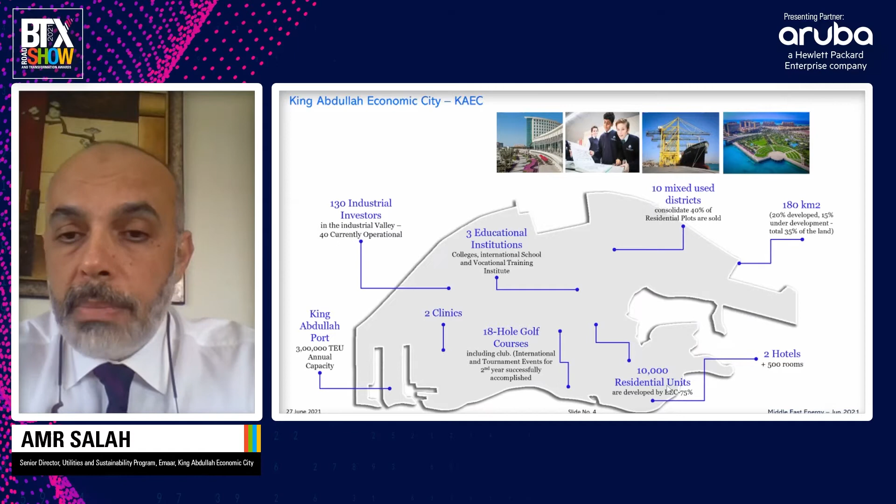We have 2 hospitals and clinics, an 18-hole golf course, 3 educational institutions, 10 mixed-use districts for residential and commercial use, almost 10,000 residential units - about 50 to 60,000 residential capita. We have 2 four-star and five-star hotels, with up to 500 rooms.

The whole area of the city is about 180 kilometers square. 20%, as I said, is developed so far, 15% is under development, and the rest is under planning.

It is actually a huge city in terms of area - equal to Washington, D.C. in size - and we are trying to make this a model of a true smart city.

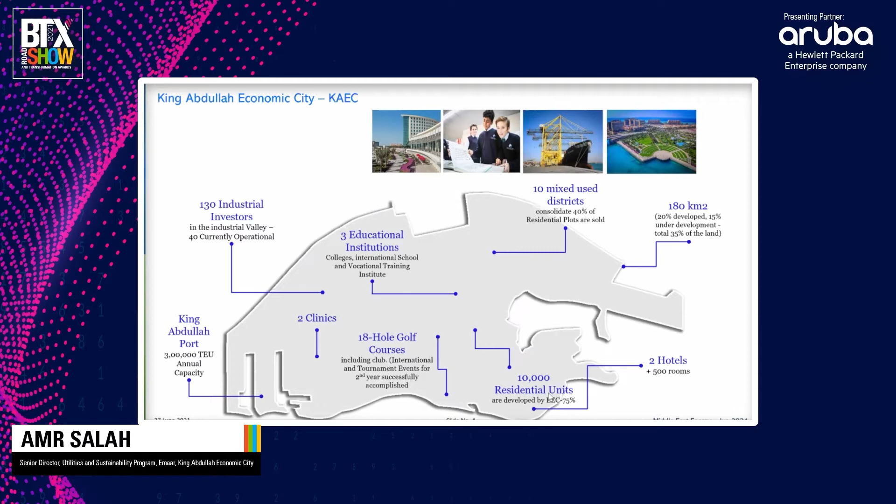As I said, we're talking about 180 million meters square, or kilometers square. The port is about 14.6 million meters square. We have 470,000 meters square for the high-speed railway, one of the stations on the high-speed railway on the west coast of Saudi Arabia, coming from Mecca, Medina, and King Abdullah Economic City. We have about 48.8 million meters square total for industrial and logistic districts area.

We spent about 9 billion SAR on infrastructure investment to have state-of-the-art infrastructure. The infrastructure supplies potable water for industries and residential use, about 30,000 meters cube - this is our current demand. And we are installing about 3,300 smart meters; we'll talk about the smart meters in a while.

Plus, we have about 310 kilometers length of water transmission and distribution system. We have 500 megavolt ampere connected load in the national grid, equipped also with almost 3,500 smart meters for electricity and digital billing.

We have 12 kilometers length of high voltage transmission system, 1,200 MV/LV distribution electricity grid, 14,000 poles of LED street lighting, 12.8 kilometers length of dry gas network to serve the gas zone in our industrial area for our industrial customers, 240 kilometers of roads, 161 kilometers for the drainage system, and 2,000 of sewage treatment per day - this is still at a very initial stage.

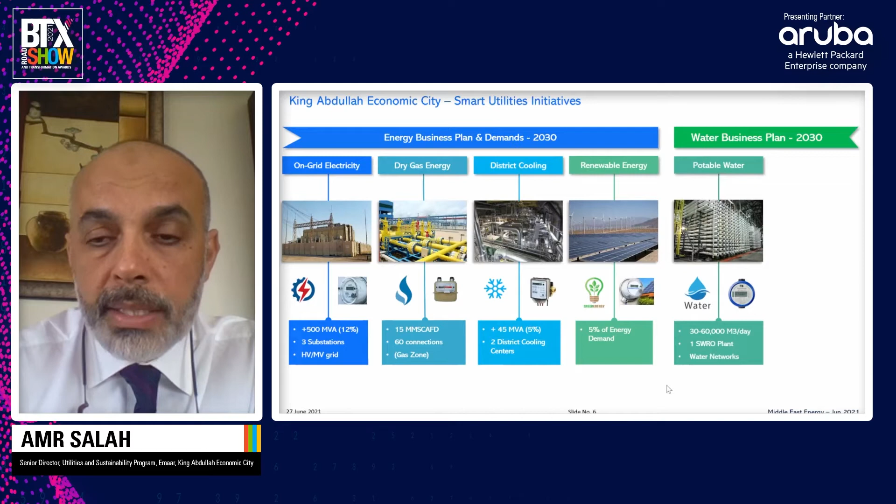For water, we have a plant producing up to 60,000 cubic meters per day with seawater reverse osmosis plant technology, which we'll discuss in a while. We have a water network and distribution system. The sewage treatment plant is one of the innovative solutions used in our plant and city, treating up to 12,000 cubic meters per day, though the demand is currently in an initial stage.

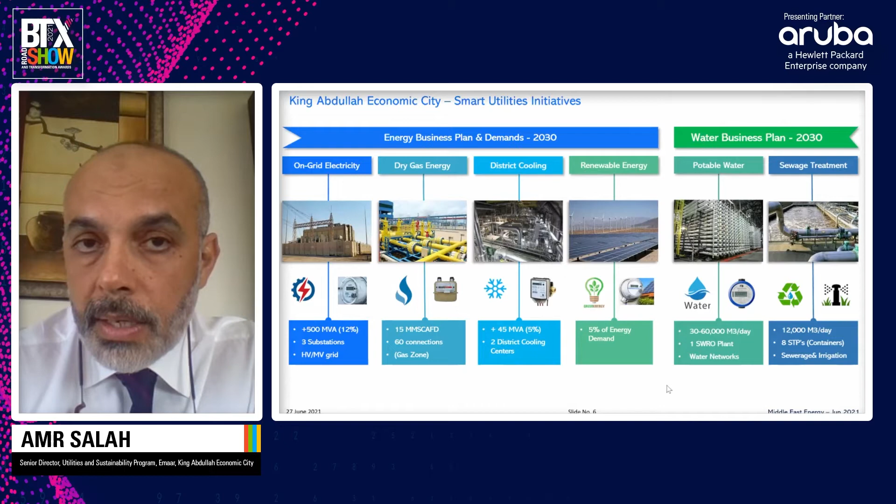It is 100% environmentally friendly, with 60% less energy versus other technologies producing water. We spend about 3.9 kilowatt hours to desalinate 1 cubic meter of water, while other technology can spend about 14 kilowatt hours to produce 1 cubic meter of water. We have energy recovery systems inside the plant for this conservation and economy of scale.

Outside the plant, we have a very good system for water quality monitoring to assure the water quality is consistent and reliable for different types of customers, like residential, industrial, leisure, and tourism. We are fitting all of this, as we said.

Smart meters can monitor leakages and provide instantaneous readings for customers. Any customer can use their mobile phone to see how much water they've consumed so far and the projected water consumption. Maybe this is not that essential for residential, but it's very essential for leisure, tourism, hotels, and industrial hubs, who are very concerned about their efficiency.

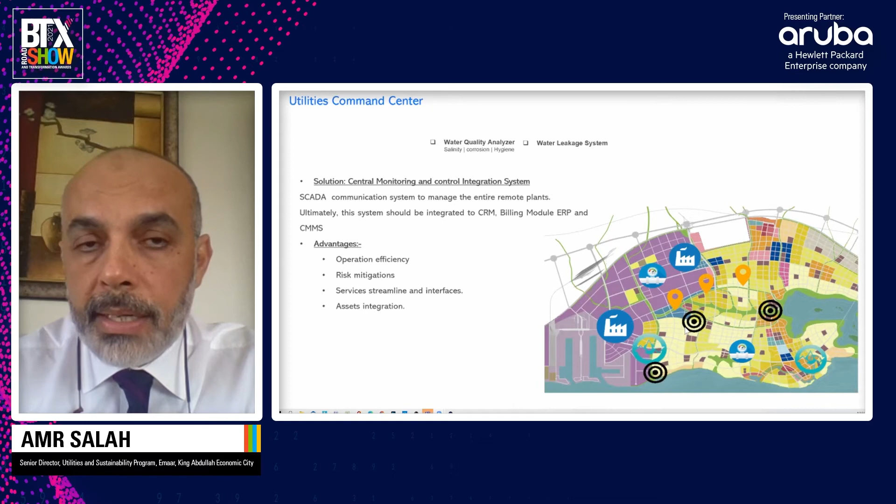Last but not least, we have a utility command center that we need to connect all these systems together through a very smart solution, so the operator for the whole city can see all the systems, including the water leakage system, water quality analyzers, pumping stations, AMR automatic meter reading systems for water and power, RO plants, sewage treatment plants, and storage tanks.

Everything can be monitored instantaneously and reflected onto your screen. So the operation director, or whoever is at the manager level, can see the operations in situ, and can identify any measures for improvement and areas for increasing efficiency on the spot.

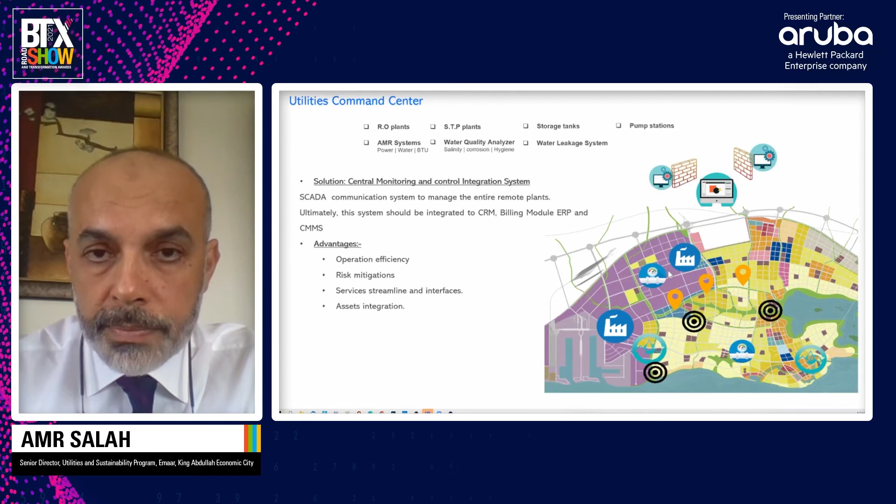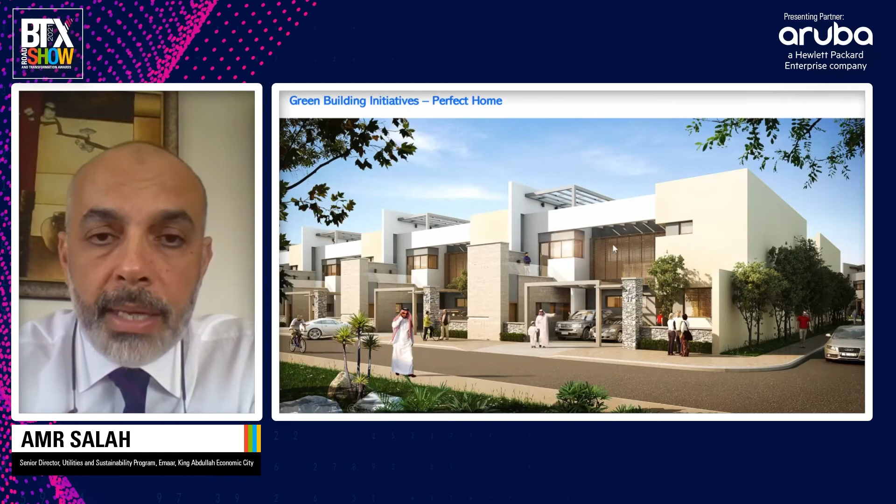Now, I'm going to shift a little bit into our residential homes, or perfect homes, as we like to call them. Utilities, when very ambitious or advanced and innovative, mean nothing if we are not providing our customers with homes that are also smart and integrated with our utility systems. So I need to shed some light on our design for the perfect homes.

Starting from lighting, we use light as a decorative element, creating mood through very efficient LED lamps to ensure proper conservation of power consumption. I'm not going to elaborate further, because LED is now a mandate technology. We need to utilize this, giving a saving of up to 40 to 50% of our lighting bill compared with normal bulbs.

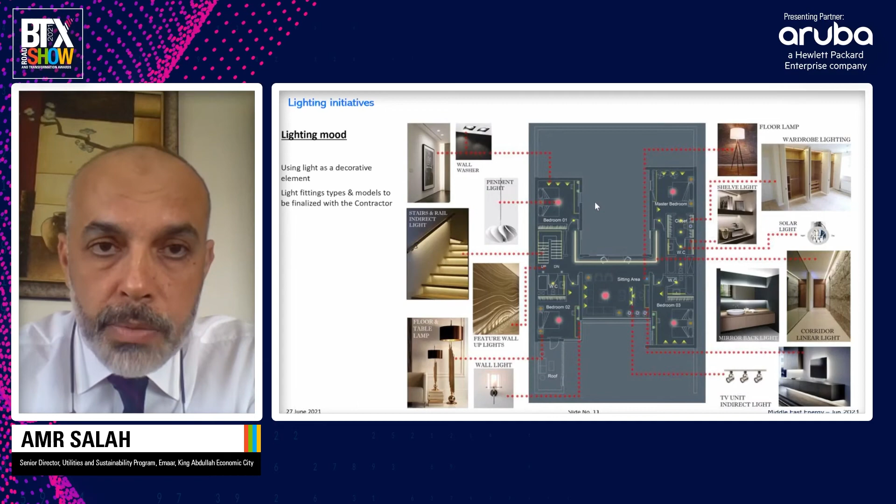In terms of ventilation, natural ventilation or shading strategies have a big impact on reducing lighting and air conditioning loads, as well as insulation and heat dissipation into the homes, starting from wall thicknesses to double glazed windows. All of this type of material has a significant impact on our energy solutions and our energy conservation strategy.

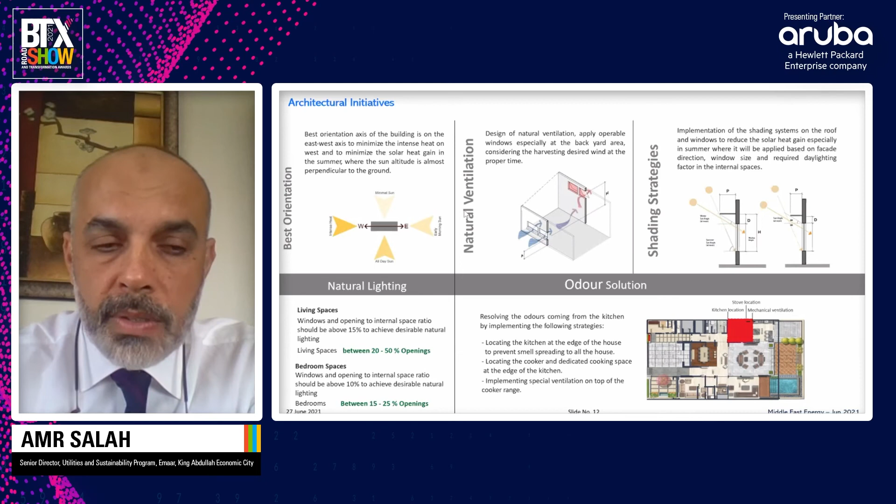In terms of MEP initiatives, we use ducted central package units to ensure our air conditioning is efficient and our energy is conserved. The well-constructed details for this type of home assure proper thermal insulation inside, so your cooling system is not wasted unnecessarily. This will provide 40% savings in your energy consumption.

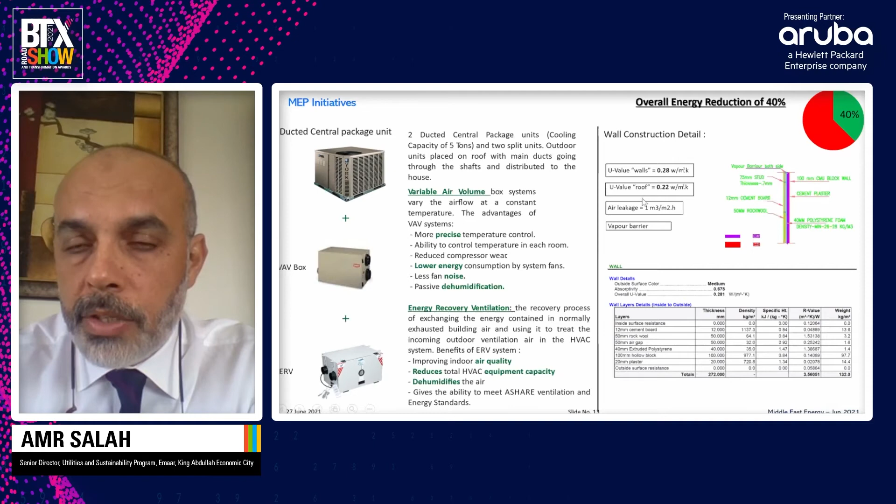As well as LED lights, we're now using a central solar water heating system rather than power. This gives you 100% power reduction for water heaters. Plumbing fixtures are also a very essential part of this story for water consumption.

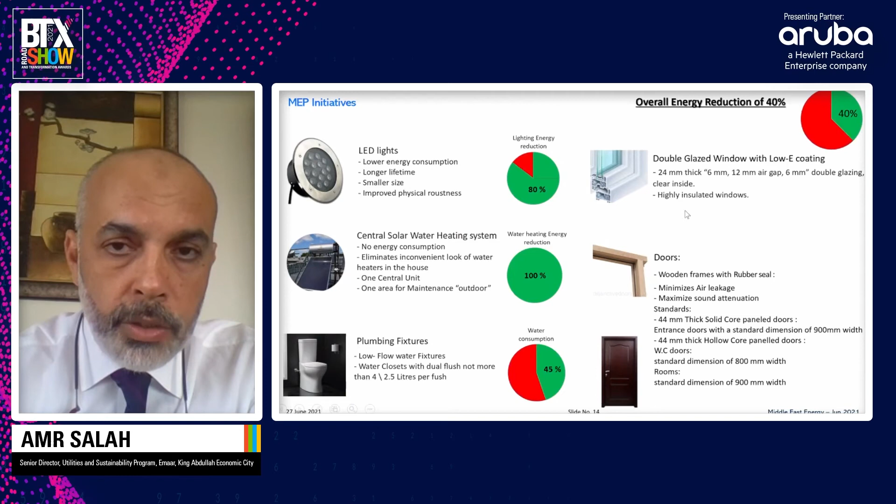Water efficiency is another important topic, because water equals energy in this type of world. We also talked about doors and frames for glazed windows and all of that. Overall, this will give you a 40% reduction in your energy consumption.

Not only that, we're also trying to go for renewable initiatives, like wind air bush systems for these gardens, and photovoltaic solar panels on the roofs. Again, we're talking about solar water heaters and how we can use them. We also have some innovative wastewater treatment within each house, so you can reuse your water or gray water into your flush tank and for irrigation in the garden.

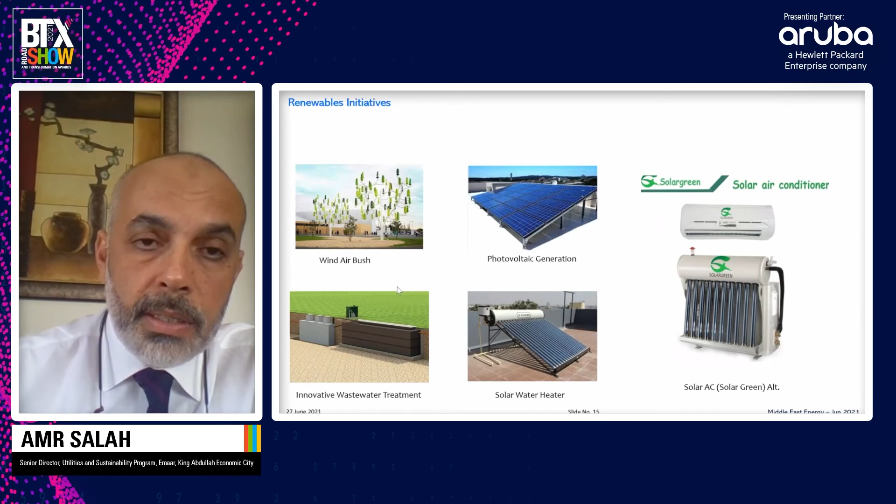All these initiatives have been well illustrated, piloted, and now we are selling our product as a very integrated product to our customers. I hope this quick presentation gave you some idea about King Abdullah Economic City, our vision, how it is linked to Saudi Arabia 2030 vision. Hopefully it has contributed to that, and our care about customers with the diversification we have - industrial, tourism, leisure, commercial, residential - to satisfy their different needs in terms of utilities, redundancy, and reliability. Sustainability is our focal point of interest, and actually it is now mandatory. Without sustainable cities, the cities or even the economics cannot maintain their growth and efficiency.